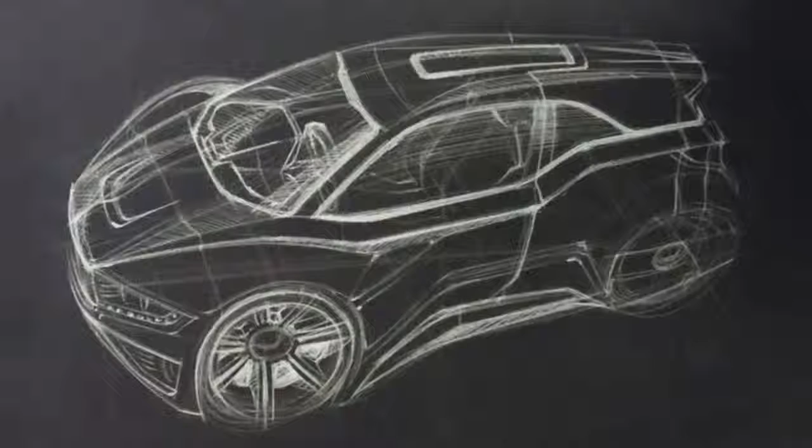When he brought the concept of a single passenger, three-wheeled commuter electric vehicle to me as something that he was interested in pursuing and asked me what I thought, it was brilliant. If you look at the numbers, there's not a lot of competition in electric cars. There's still a bajillion gas cars being built. The electric car is like the internet, and a gas car is like a fax machine. Once you drive it, you get the difference.

We knew right away that if we were going to try to meet any kind of timeline, there was never a chance that we were going to be doing this on paper. This had to go from stylus sketch into a digital design immediately. We weren't told that automotive firms have 200 engineers in a room and it takes them a year and a half to design a taillight. We just designed the whole car.

This car had to hit the ground and actually function. It had to perform like we expected it to. Suspension had to perform, the drivetrain had to perform. Rich was brought on a little bit later in the process to do finite element analysis, chassis design and development.

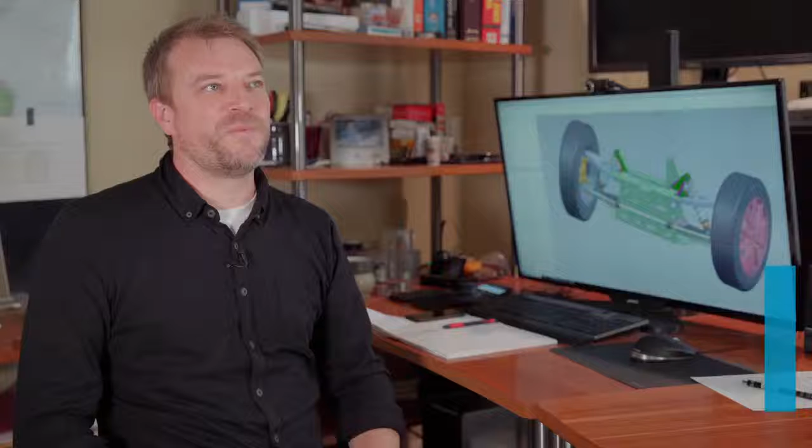What we're looking at is a totally different way of thinking with these smaller companies and the way that they're approaching problems. They have smaller budgets, but they have more nimble teams. And what they're looking at doing is getting tools which enable them to achieve engineering excellence on small budgets with small teams. And tools like NX and SimCenter allow them to do that.

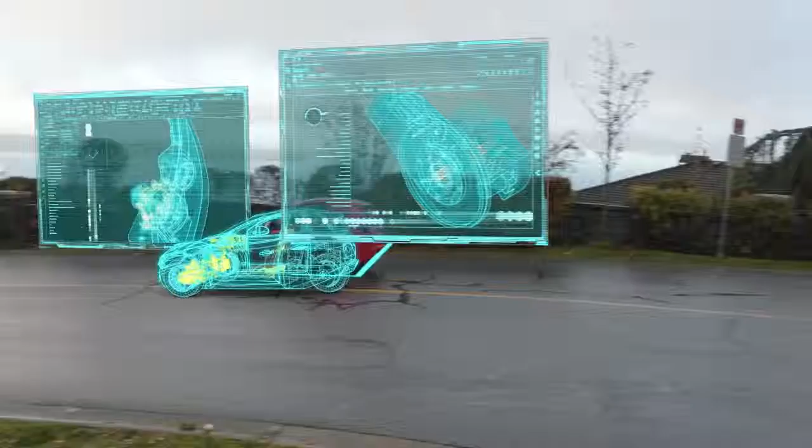So we have 75,000 of those cars coming out in the next 3 years, and more manufacturing people that we're reaching out to, top-level manufacturers. When I speak to a top-level manufacturer and I tell them what software we have our car fully designed and engineered on, it makes my life and their life a lot easier to deliver those cars to consumers.

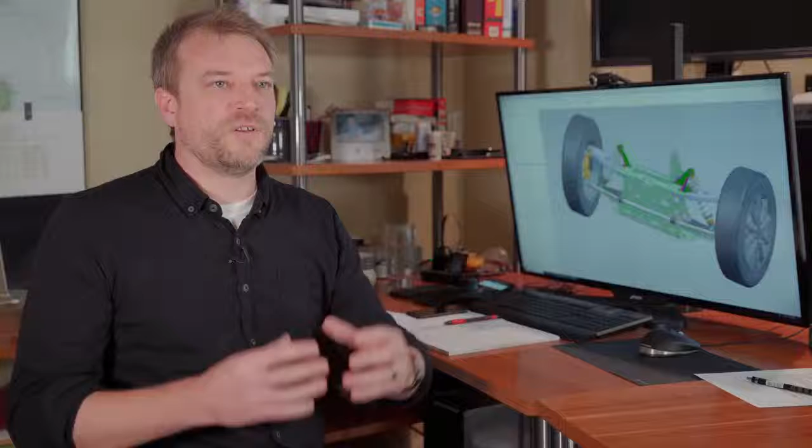So that manufacturing provider in China, Zongshen, is also using NX as the primary tool for the design. So they will take our design, evolve it slightly for high volume production, and look at all the different moldability and formability requirements that they have for their mass volume production.

We're actually able to talk to our vendors. We're able to talk to our engineer in Michigan, and he's able to talk to Tammy here in our office, and we can talk everything from mechanical bits to electrical components to wiring diagrams and everything else.

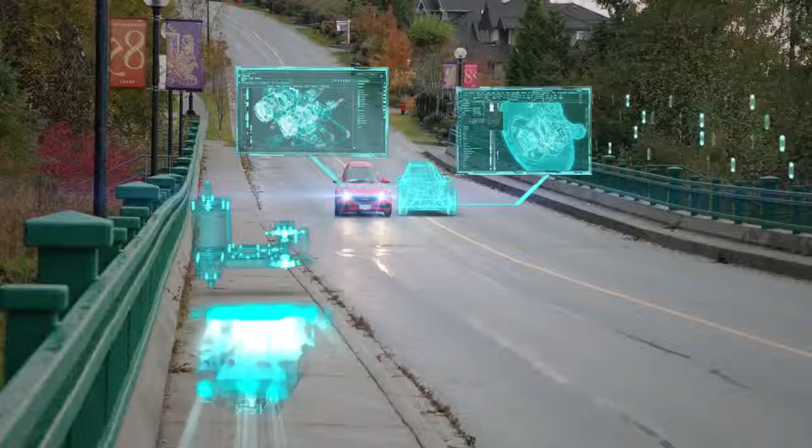With SimCenter, we have a direct parametric link back to the CAD data, all in the one GUI. So that means that we can analyze the design, work out, hey, can we move this? Can we reduce some mass here? Go back into the design, iterate it, 2 clicks, and we have our results updated.

These are things that were new to Electra Meccanica before we started working with Maya and Siemens and pulling this in. But we brought in some fresh scrubbed young engineers in mechatronics, mechanical engineering, electric engineering. Tammy and the team have done a fantastic job of pulling in what they know, what Henry and I didn't know, what they said, oh, if we can get this software, this is going to be awesome. Faster to market, less chance of error, better value for the end buyer of the car. Maya and Siemens can provide us the tools to make your company great.

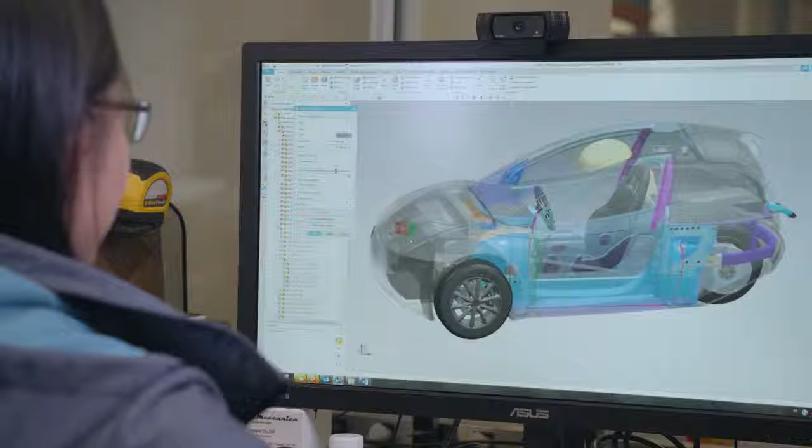SimCenter helps a lot with certification, predicting what might go wrong, help us accelerate the process. If we have all the assemblies sent out for testing and then come back with feedback that it failed, then that would be about 2-3 months. If I do analysis on it, it took me about a week or 2 weeks of setting it up, and that's way quicker, way faster, and saves a lot of time and money.

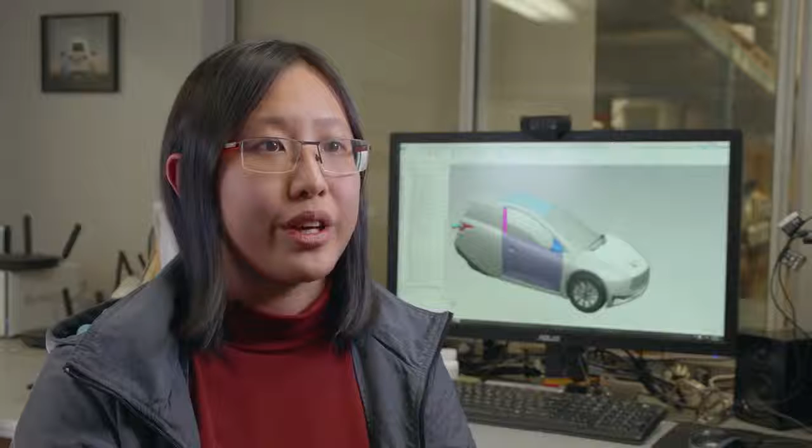With Siemens and the 3D printer, we can design it, print it out right now. We can get it the next day, maybe 2 or 3 hours later, and then put it in the car, try out if it fits. So we'll generate our parametric toolpaths here, which is another benefit to keeping everything inside of the one system. Have it fully parametrically linked into our CAM software, which is inside of NX as well, and then straight to our CNC machining center.

The engineers that we're using at Electra Meccanica are so inspired that we can sit around, come up with an idea, or even they're coming up with an idea, or Henry's come up with an idea, boom, it's ready to go. That's awesome. You're literally unleashing the potential of the human being to not just think of a solution that will work, but create it. And there's magic in there.